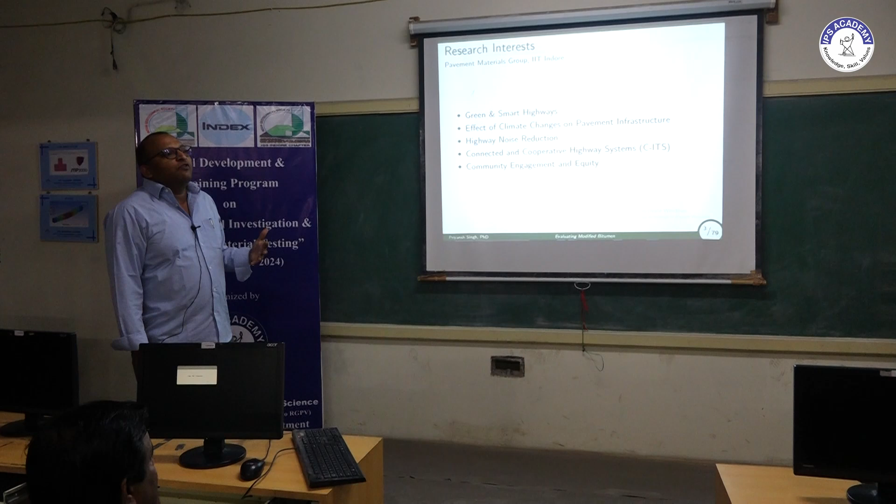The highway noise reduction, how we can reduce the noise of the highway because of the tire interaction with the highway surface. Also, we want to explore the connected and cooperative highway system, CITS, and also the community engagement and the equity distribution in the highway, because every highway project has almost most of the impact on the society from which it is going through, or the area it is going through.

So this becomes an essential part. So currently our group is focusing on all these domains. They are here in IIT Indore. As far as today's discussion is concerned, so we would be limited to these 3 IS codes actually.

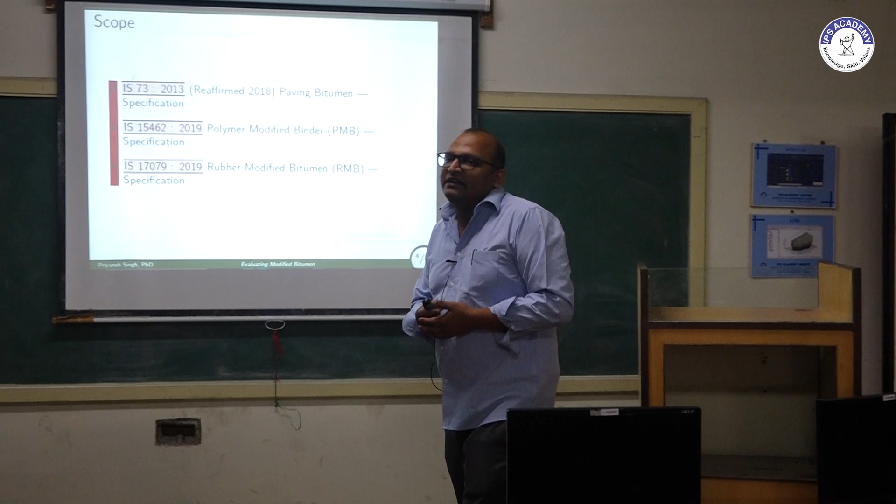So these IS codes are IS 73 2013. I think you must be aware of these specifications. This is actually the specification which gives binder grading or viscosity grading. The recent development happened in 2013 and later on it was also revised in 2018, but more or less they are the same. Then we have two latest codes, IS 15462 and IS 17079.

They both came in 2019 and they are the codes related to polymer modified binders and crumb rubber modified binders. Don't get scared by the words crumb rubber or polymer modified. Later on we will try to explain what these things are.

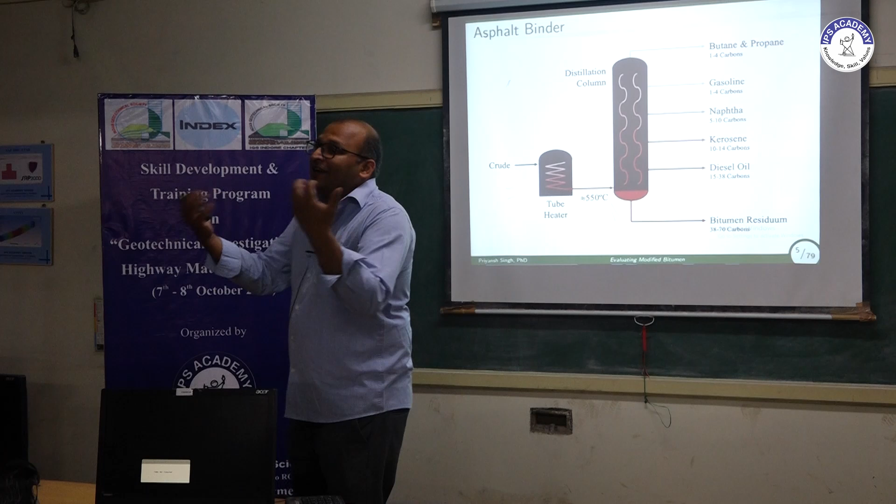We all know how we get binder. So it is just a distillation process of the petroleum, whatever we extract, and we distill that. The heaviest part of that distillation is your bitumen.

If you see the chemical composition of bitumen, it mostly has carbon, around 70 to 85%. Then the next major component is hydrogen, followed by sulfur, and some traces of nitrogen, oxygen, nickel, or other materials.

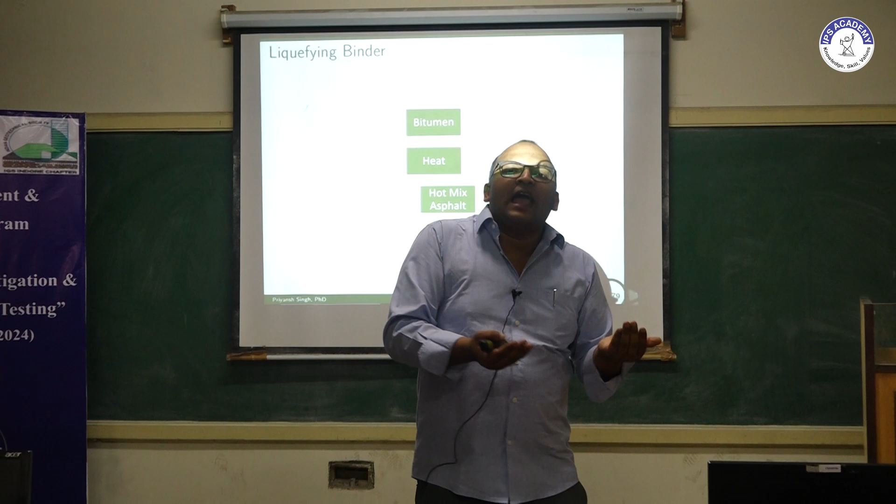Now the introduction about binder is fine, but as a civil engineer, what do we want to do with that binder? We want to make our roads out of it, and to make the road with that binder, we need to mix it with aggregate or other material. Like you mix cement with aggregate using water, but here in asphalt we cannot add water—water will not liquefy the asphalt material.

So instead of adding water, we use one technology, which is heating the binder. As you heat it, the viscosity will decrease and your binder will become more fluid. This is one technology; there are others too. You must have heard about cutbacks, emulsion, or other materials—they do the same thing but with different technology. Here today I am concentrating only on heating your binder.

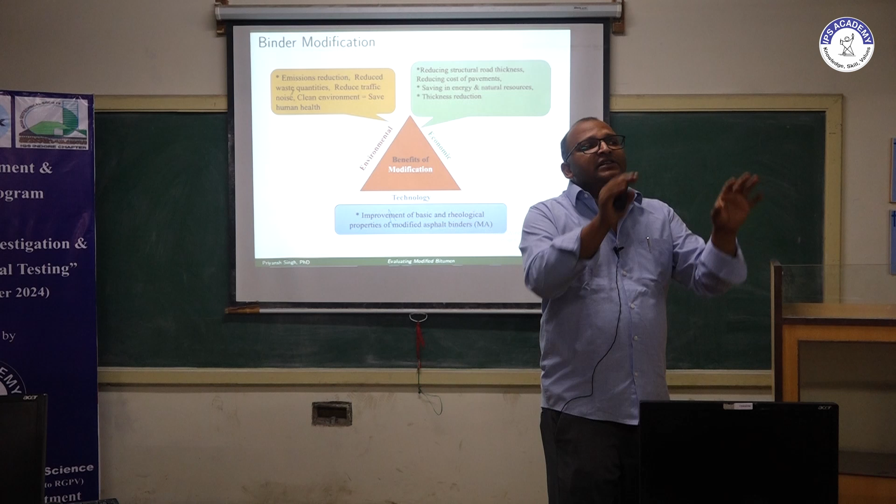Now, whatever existing binder we have, why do we need any modification in it? When I say a neat binder or bitumen, it means it's just a raw extract we got after distillation from the petroleum product. That petroleum product is cooked by refineries to meet viscosity grading, maybe VG 10, 20, 30, 40.

But nowadays temperatures are reaching extreme levels. We are seeing air temperatures of around 49 to 50 degrees. So pavement temperature will be a little higher than that—it may hit around 53 or 55 degrees Celsius.

Now at that temperature, if you recall your softening point test, today you must have done your softening point test. What value did you get? How much, 60? Which grade of binder were you testing? Cut back? No, cut back is a different thing, it's not a binder. Okay, anyhow.

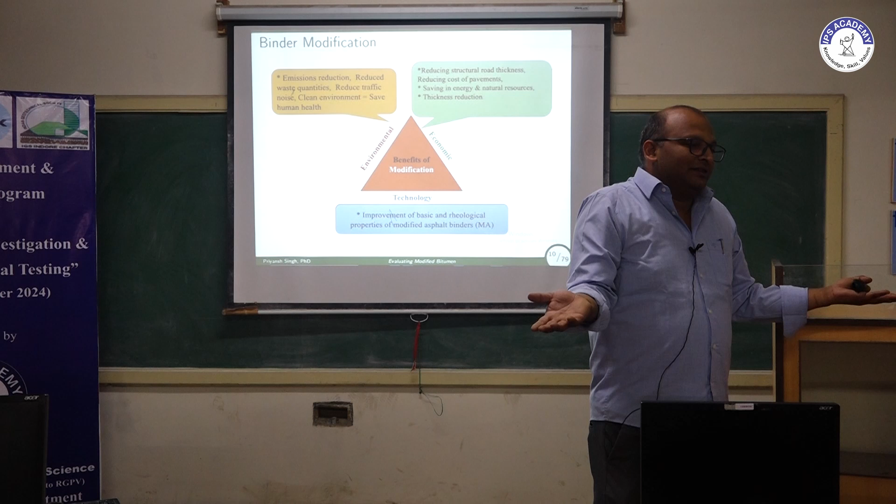But if you see the softening point value for most neat binders, it comes around the same range I'm talking about, around 50 or 55 degrees Celsius. That means at that temperature my binder is going to be soft enough to get deformed. So I need to make my binder more strengthened, to increase its strength so it can take more stress—thermal stress, climatic stress, or other kinds of stresses.

The modifiers we currently use are waste materials, in the form of plastic, crumb rubber, or other materials. So whenever you use a modified binder, you are also helping recycle some waste product. Because these binders can take more stress, your pavement layer thickness will be reduced, making the pavement more economic. Also, because the binder is strengthened, the pavement life will be longer. So there are multiple advantages of modification in your binder.

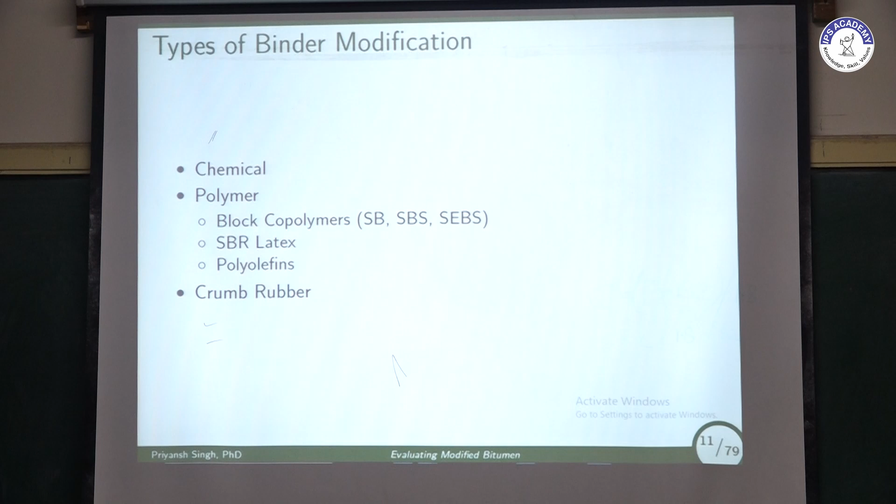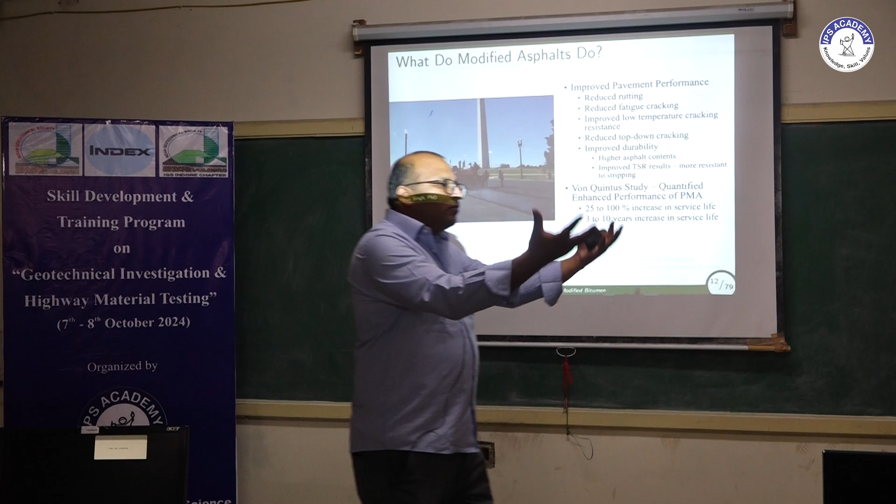There could be different types of modification: chemical modification, polymer modification, or crumb rubber modification. In this part of the talk, we will only talk about polymer and crumb rubber modified binder, not chemical modification. Now, what are polymers? Polymers are actually a chain. Whenever you add a polymer into the binder, they cross-link with it, and that's how they increase their strength. So if you modify your binder, there could be different types of benefits.

Some highlights of those benefits I have summarized here in this slide. They can improve pavement performance in terms of improving the rutting resistance. What is rutting?

Oh, this happens, don't worry. We will explain rutting also in a further slide.

So reduce fatigue cracking, improve low temperature cracking, reduce top down cracking, improve durability, and also increase the service life.

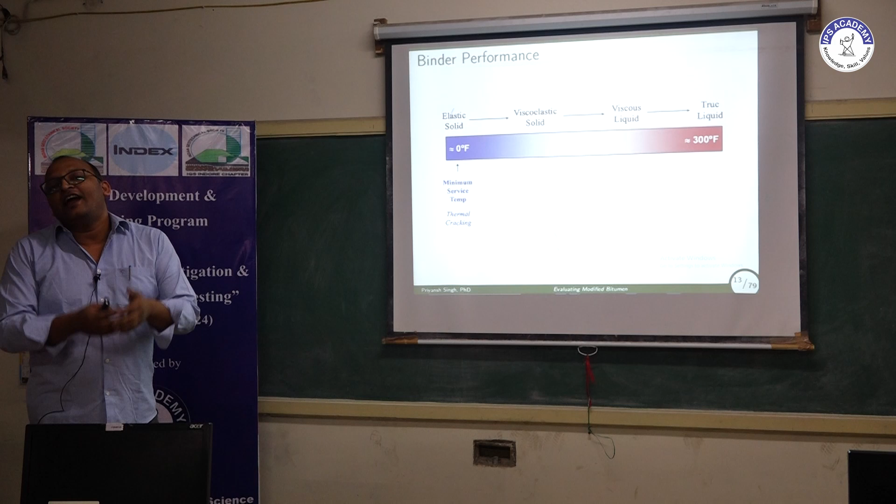Now, in order to understand the binder, first we need to understand what different scenarios my binder goes through. Means if you have fever, you need to understand how your temperature is rising, then only you will give the correct dose of paracetamol, isn't it? Similarly, we need to understand the different stages of binder. So those stages in case of binder is when your binder is at 0 degrees Fahrenheit or at very low temperature.

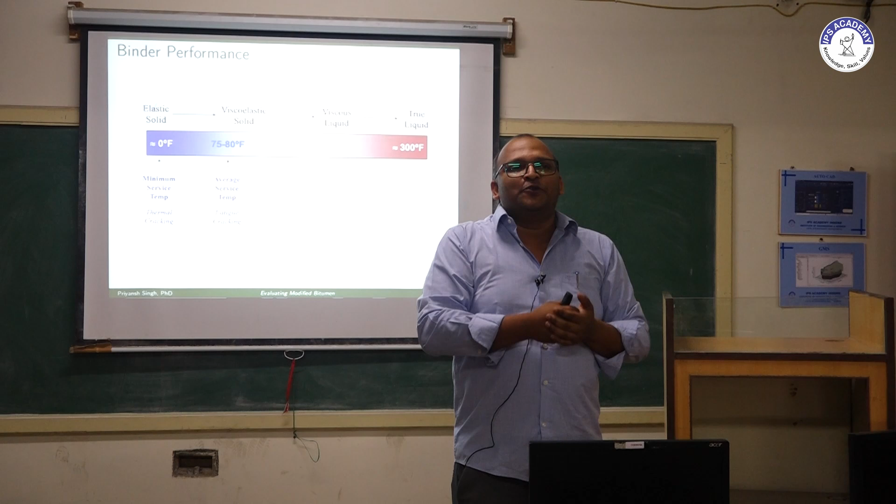The next temperature important for the binder is the average service temperature, that is around 25 degrees Celsius. Now this 25 degrees Celsius temperature is very important. If you want to connect this temperature with whatever test you have performed today, at what temperature have you done your penetration test? At 25 degrees Celsius, isn't it?

And at what temperature have you done your ductility test? 27, that is as per the old code. Now it is being revised. We need to do the ductility test at 25 degrees Celsius on the RTFOT sample.

So this average service temperature is actually the ambient temperature in the European and American region. But because we copy everything from the European region, that is why we have taken this 25 degrees Celsius temperature from there also. So we assume that our ambient temperature, our average temperature, is going to be 25 degrees Celsius, and this is the temperature when you will undergo the fatigue cracking.

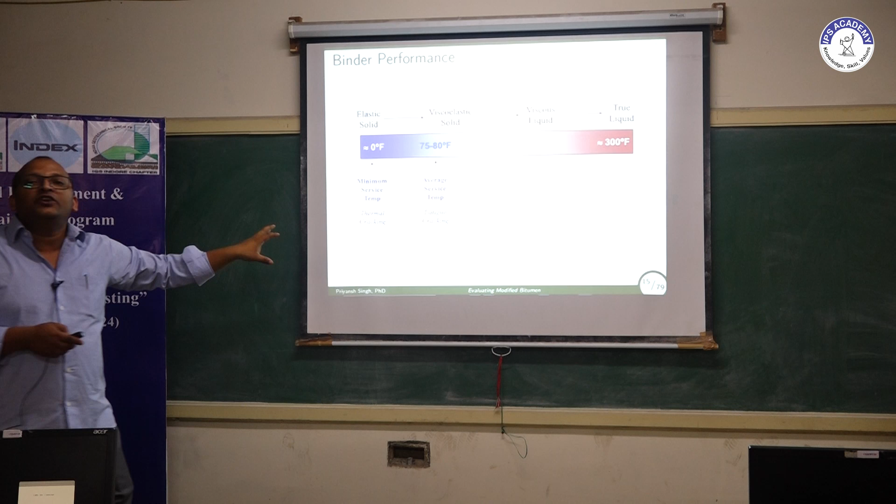Now what is fatigue cracking? This is the cracking because of load. If you have a number of repetitions of the load over the pavement, the capacity to take load will decrease, and whatever stresses accumulate will release in the form of fatigue cracking. This is also known as alligator cracking.

The next important temperature your pavement or binder will undergo is the maximum service temperature. This is the temperature which is around 50 or 60 degrees Celsius, maybe 50 or 55 degrees Celsius in India maximum. And if you see, this value is around the softening point value, you will get around 50-55 degrees Celsius.

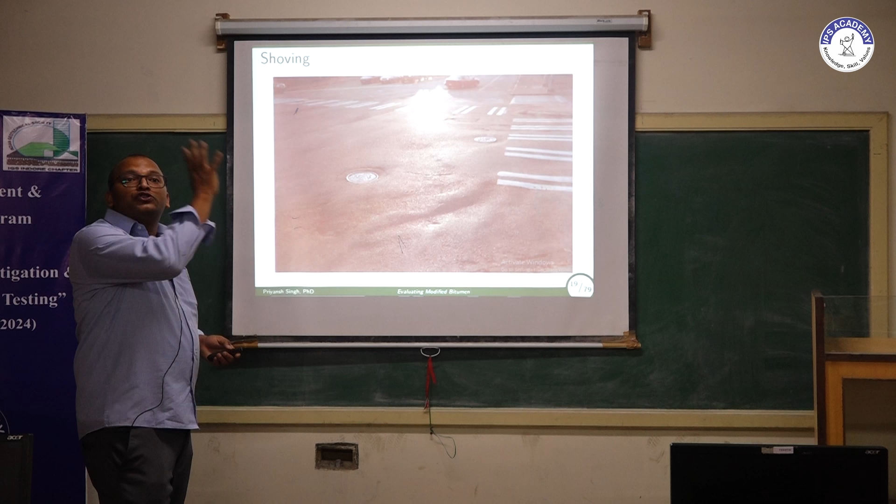So this temperature is also very important, because at this temperature the pavement will undergo plastic deformation which will be unrecoverable, and that is known as rutting. So whenever you have a number of vehicles moving on the same path, they will make a gully-like structure, and that is known as rutting. This happens at higher temperature. Also shoving, you might have seen this kind of plastic undulation on the pavement. This also happens because of heavy temperature deformation or high temperature deformation.

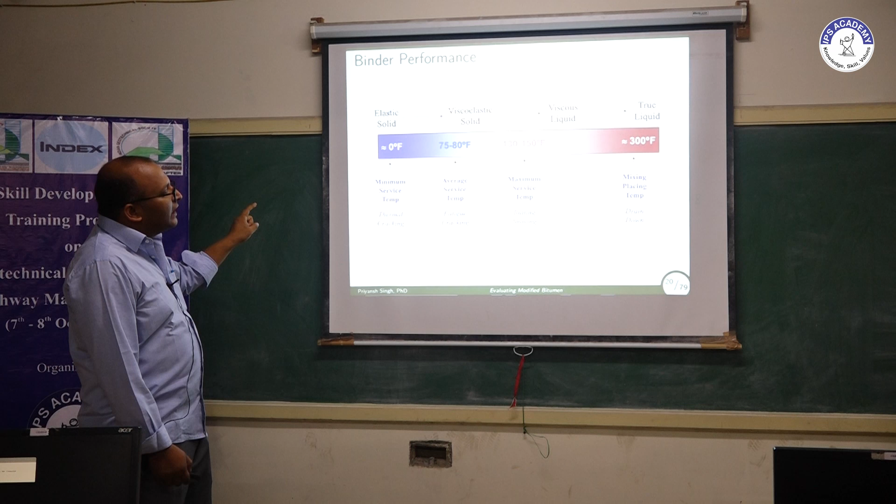Now the next important temperature which your binder will undergo is the temperature at which you mix it with aggregate. That is going to be 135 degrees Celsius or maybe 160 degrees Celsius, depending upon your mix design. So all these temperatures are very important in order to see the binder's performance, and that is why we have designed a spectrum of tests to characterize binder at all these temperatures.

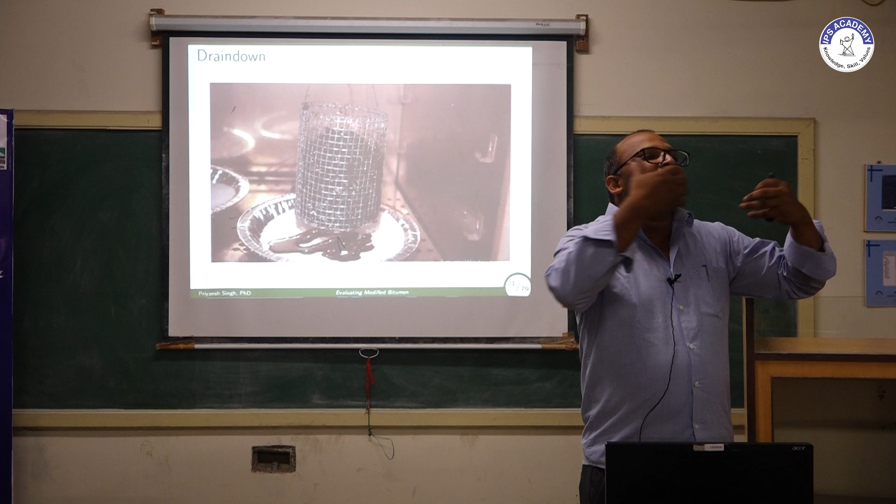Now let's see what different tests are there to characterize our binder at these service temperatures. So the first test I am discussing is at the high temperature, which is drain down. Whenever you are mixing your binder with aggregate, the binder and aggregate should not separate from each other. If it is separating from each other, it is called drain down, that means if you put your mix, binder will separate out. That should not happen. This test is related to mixing temperature.

Now let's discuss some other conditions our binder undergoes. When you get your neat binder from the refinery, the binder will have no aging. But when you heat your binder to 135 or 160 degrees Celsius, the binder will undergo some aging.

After this heating, you will mix it with aggregate. At that time also, the binder will remain at elevated temperature. And again, when you transport from the mixing plant to the field and compact, in this whole duration, the binder will be at elevated temperature.

You know the binder has resins and saturates, that means some volatile elements. So if you heat it, some volatiles will be lost, and also at elevated temperature the binder may undergo an oxidation reaction, and that's how the stiffness of the binder may increase.

So the first instance, starting from mixing till the laying, compaction, till cool down at the field, this is known as short term aging.

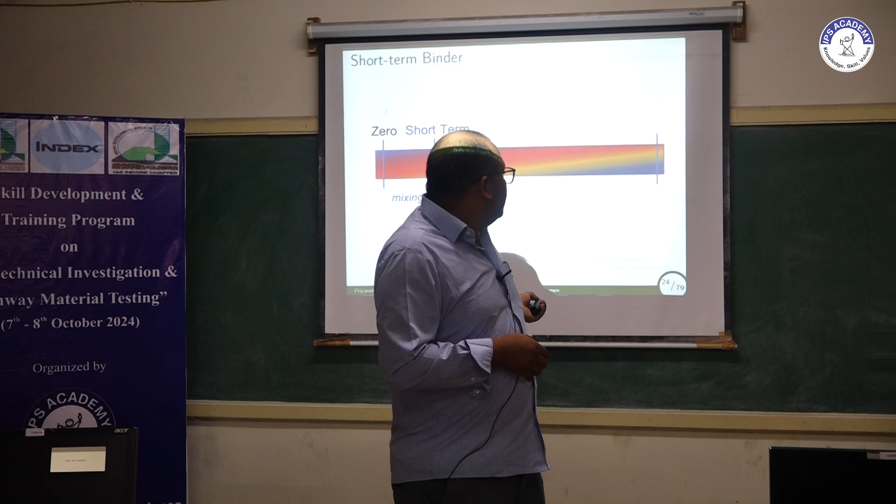Zero, when we have no aging. Then mixing and laying, when we have short term aging. And then your road will have some service life, maybe 15 years, 10 years or 20 years, depending upon your pavement design. And that aging we call long term aging.

So first let's see how to simulate the short term aging, then we will come to testing. In order to simulate short term aging, there are two protocols: thin film oven testing and rolling thin film oven testing.

Have you done this test? You might not have performed this test. This is a simple oven.

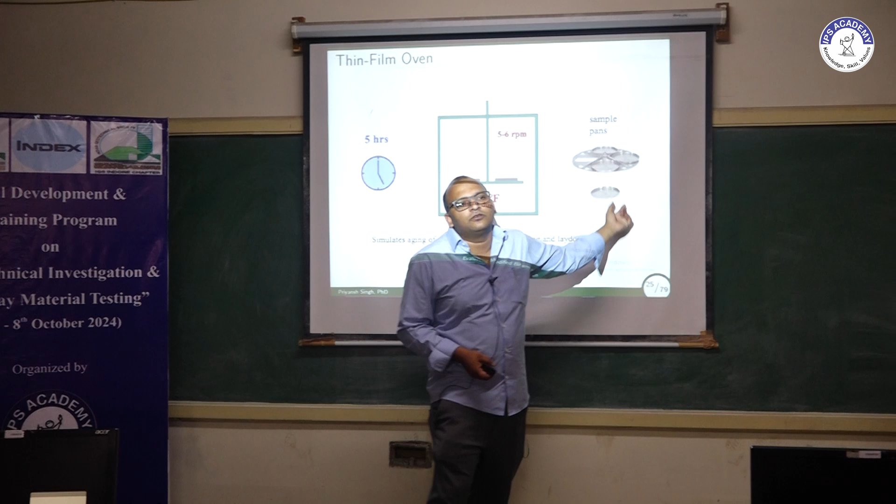There is a horizontal plate, you can see here, and then we have some small plates. In this plate we will put around 30 grams of binder, and then we will put it in this larger plate, and this plate will rotate at a speed of 5 to 6 rpm.

At the same time we will expose it to high temperature, around 163 degrees Celsius, and we will keep this binder for 5 hours, and that is going to simulate our short term aging.

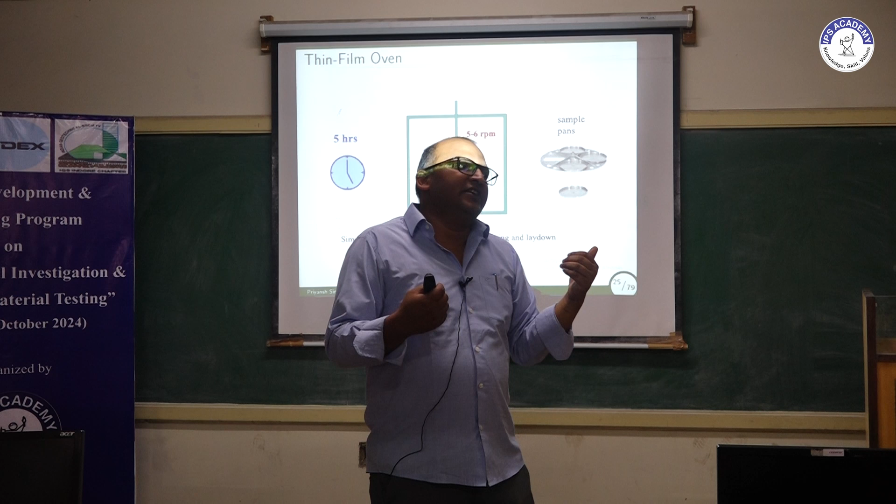Now in this test you see we require 5 hours of time, and nowadays nobody has time. So in order to reduce the time, there is a modified version of this thin film oven test, called the rolling thin film oven test.

In this rolling thin film oven test, you have a vertical cage in which you will put your samples. We put our samples in glass jars, keep them here, and blow air at 163 degrees Celsius for 85 minutes inside this oven.

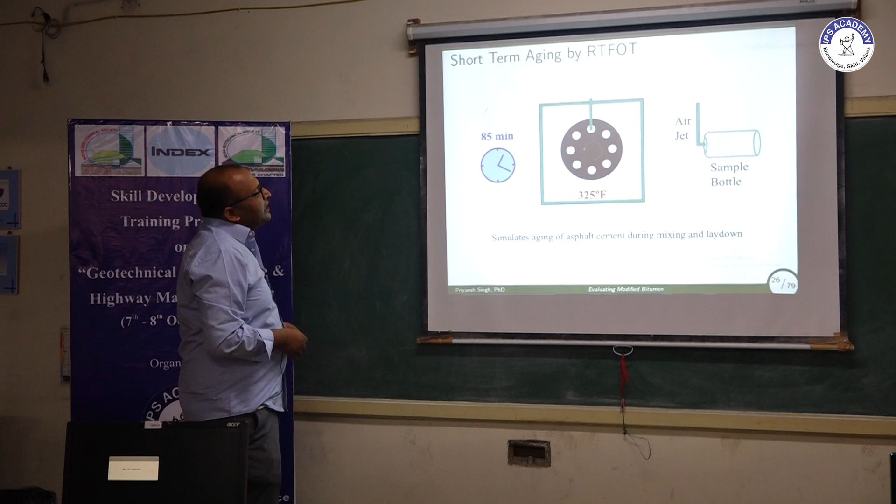During this process, the cage will rotate at a speed of 15 rpm, and because of this rotation, the binder will rotate around the tube. As the whole tube rotates, the binder rotates inside it.

This creates a very thin film of binder on the surface of these jars, and that is why the name came as rolling thin film oven test. Because the surface area is more, we achieve aging in a shorter time period, so the test takes only 85 minutes to complete.

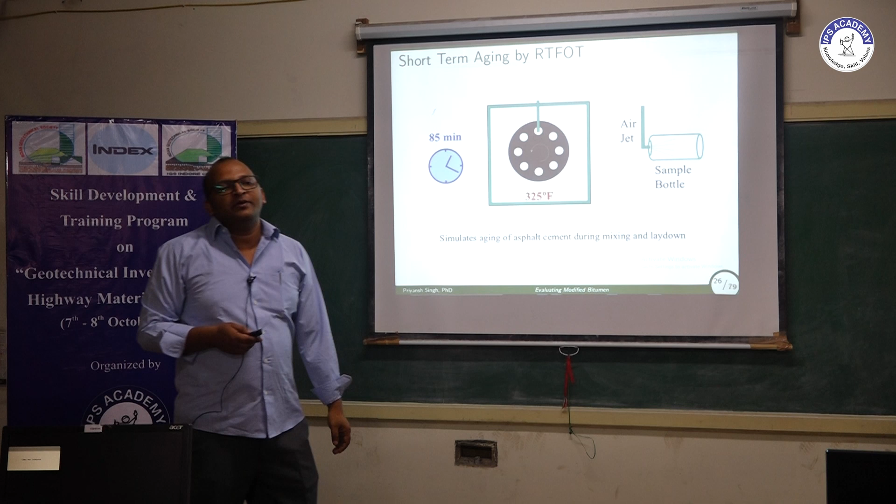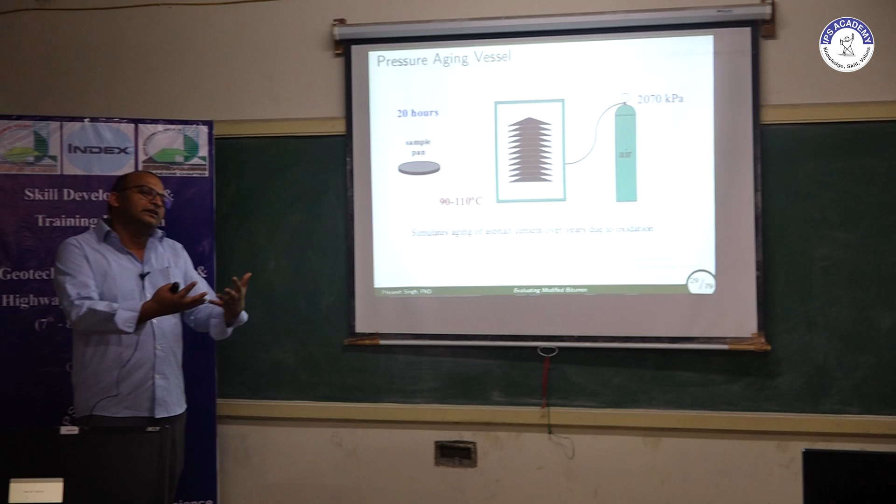Then the next aging scenario is long-term aging. Long-term aging means aging after the service life of the pavement, maybe after 10 or 15 years of time. In order to simulate this 10 years of service life of the binder, we use a pressure aging vessel.

A pressure aging vessel is something like a pressure cooker. We will have some plates, put our binders in them, and then put them inside a pressure cage. We maintain a temperature of around 90 to 110 degrees Celsius, apply a pressure of 2070 kPa, and keep this for 20 hours of time.

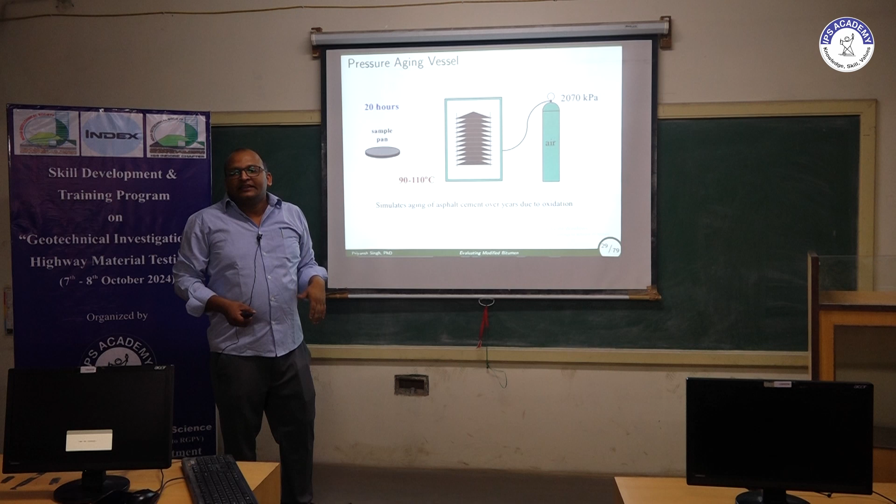This gives a simulation of when binder gets aged after 10 or 15 years.

So till now we have seen that the binder will undergo different temperatures: 0, 25, 60, 135, and we have seen the binder will undergo 3 different aging levels, which are 0, short term, and long term.

Now let's come to testing and try to correlate with these conditions how our tests are being designed.

Whenever we have minimum temperature, your binder will behave like an elastic solid. Elastic solid means a material which follows Hooke's law.

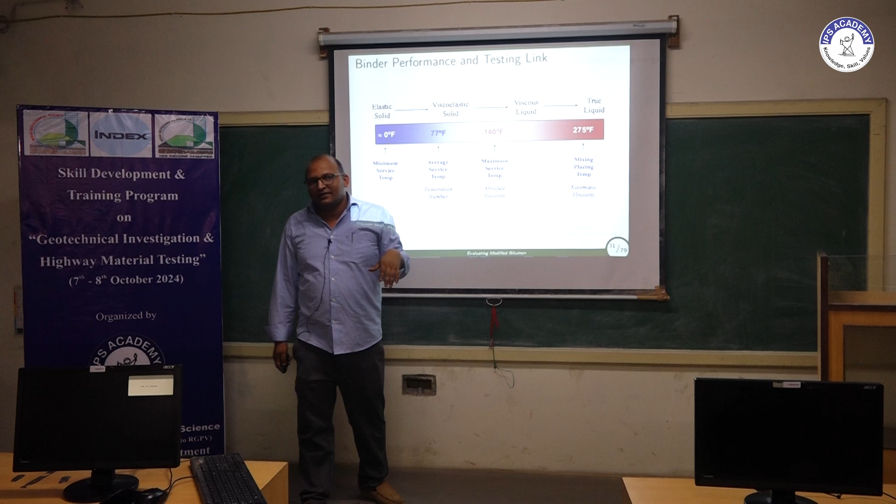At the average temperature, the binder will behave like a viscoelastic solid. I will not ask what viscoelastic solid is. If you further increase the temperature, the binder will become a viscous liquid, and if you increase it further, it will become a liquid.

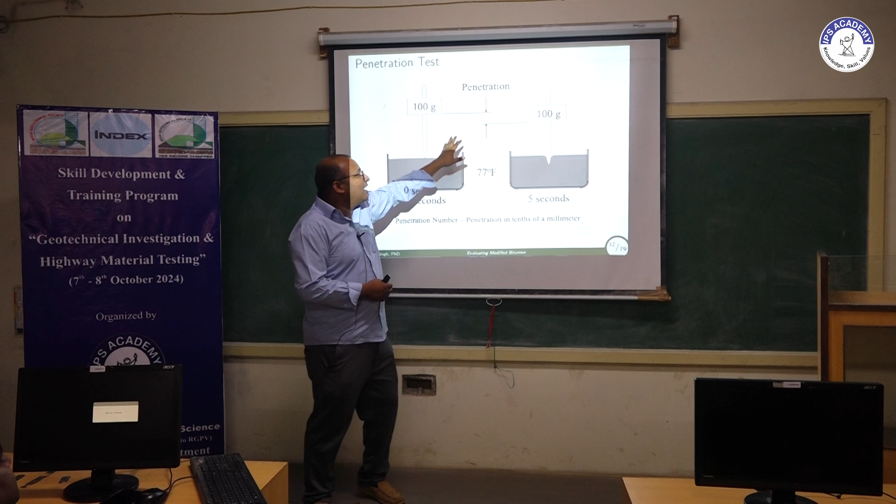So the first test we do to characterize the binder at ambient temperature, that is at the viscoelastic domain, is the penetration test. Very basic test, which you might have performed today. We will put the binder in a container, take a needle, and apply a 100-gram load for 5 seconds at 25 degrees Celsius. This is what penetration is. Try to connect what this test is trying to do.

It is trying to measure the viscosity of this material at 25 degrees Celsius, in some other terms. However, the repeatability of this test is very poor. Whenever you have performed it, you may have realized that the results are not consistent.

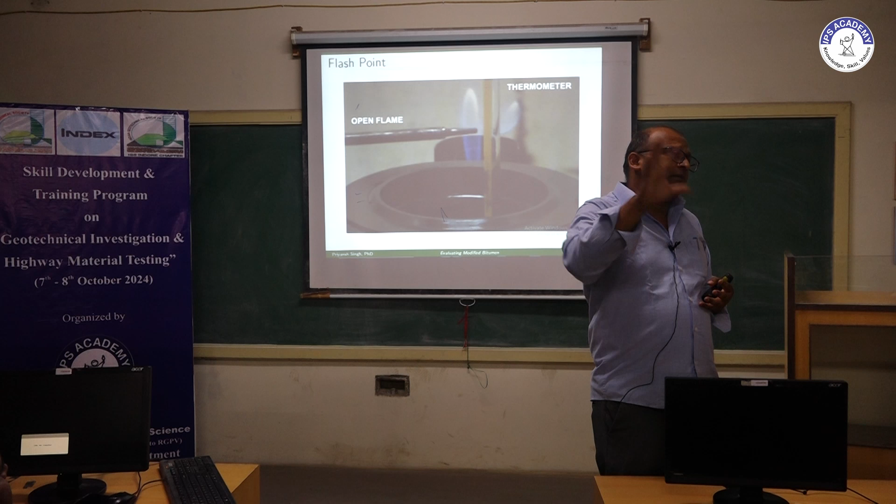The next test is at higher temperature, and that is to ensure safety, because in the field we are going to heat our binder, and we need to restrict that the binder should not be heated more than a certain temperature. In order to find out this temperature, we do the flash or fire point test. I think you must have performed this test.

Then there's the ductility test. Now, I have kept this ductility test on the unaged sample only, but the 2013 version of IS 73 has kept this test after short term aging. So just take care of this.

In ductility, we put our binder in a standard briquette, and then we stretch it at a standard rate. What property does this signify? Ductility. But in practical terms, what does ductility mean for a civil engineer? It signifies the coatability of the aggregate, that means how much this binder is going to coat your aggregate. This coatability is taken care of by ductility.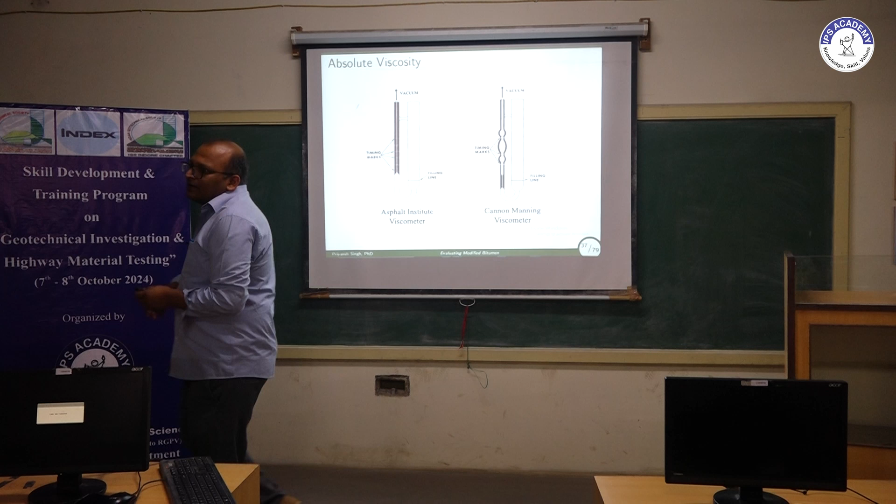Then we have a test called absolute viscosity, which we normally perform using a Cannon Manning viscometer. Have you performed this? This kind of tube is used - this is actually the Cannon Manning tube.

We put the binder in this tube and keep it at the desired temperature, which is 60 degrees Celsius, then apply a standard vacuum of 300 mm of Hg. Because of the pressure the binder will flow, and we record how much time it takes to cross from this mark to this mark, and this mark to this mark. The average of these two, multiplied by the constant of this tube, gives you absolute viscosity for your binder at 60 degrees Celsius. This is very important for viscosity grading, because the numbers you get, VG10, VG20 or VG30, are because of this test.

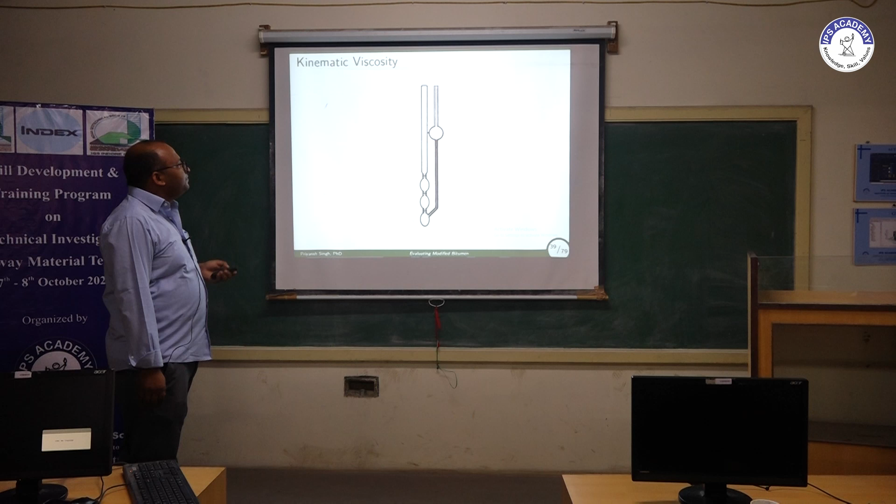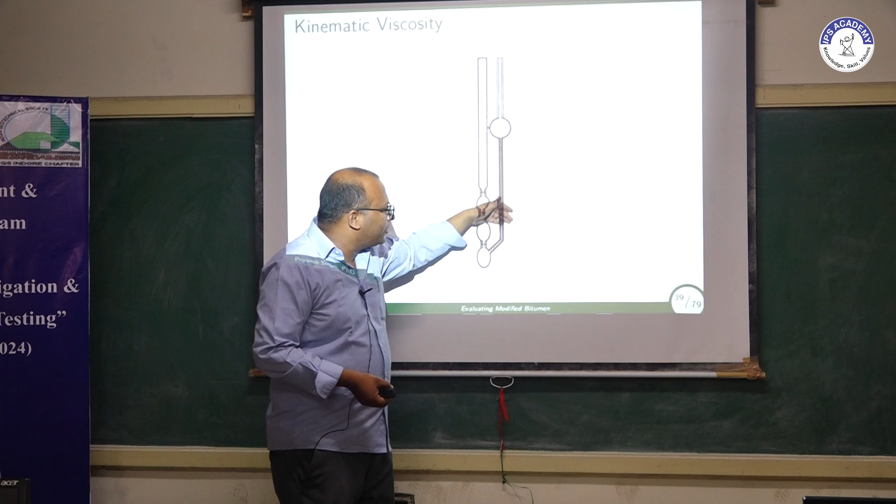Then one more test we do for viscosity is kinematic viscosity, which we do at 135 degrees Celsius, and that signifies mixing and compaction. For that we normally use a Cannon Fenske tube. We load our binder in this bulb, allow it to cross through these lines, and note the time when the binder crosses these lines. That time, multiplied by the tube's constant, gives you the kinematic viscosity of the material.

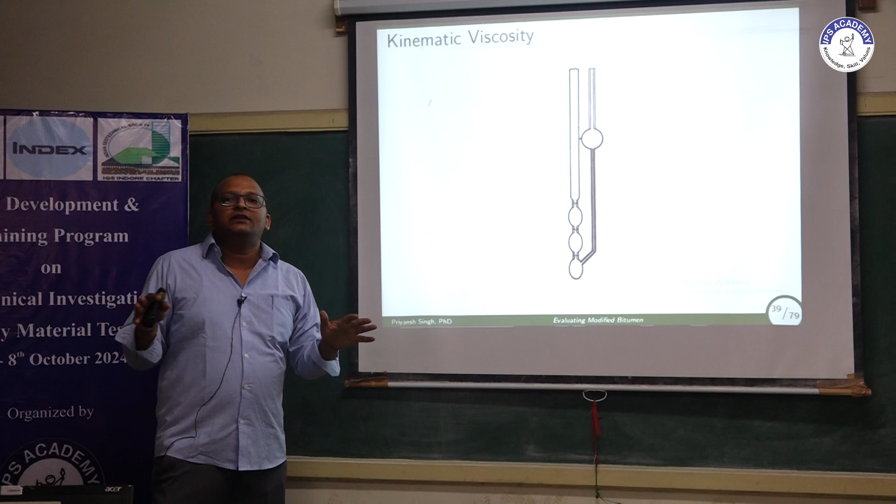Now, how are absolute viscosity and kinematic viscosity different, and why are we measuring both? We can measure absolute viscosity at 135 degrees Celsius also, so what is the reason to characterize kinematic viscosity? The first differentiation to make is that in absolute viscosity, we applied an external vacuum to make the binder flow. But in this case, we don't apply any vacuum or external force to make the binder flow - the flow occurs because of gravity, and this is the actual case which happens when you mix your binder with your aggregate. So kinematic viscosity is the real measurement of how your binder will behave when mixed with the aggregate.

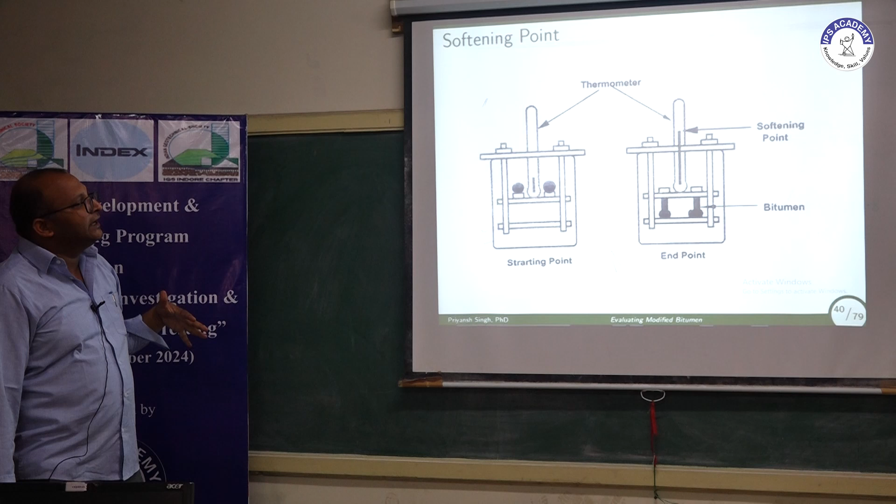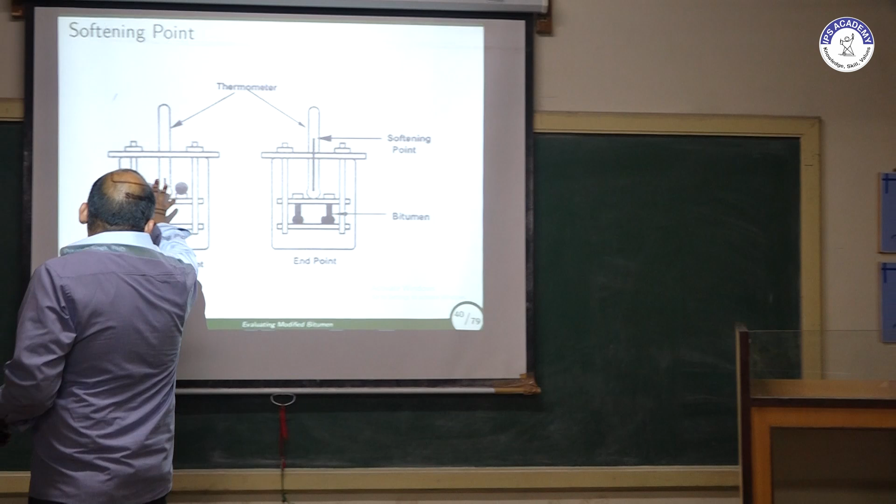Then the next type of testing on the neat binder is the softening point test, also known as ring and ball. Here we take samples on two rings, keep them at 5 degrees Celsius, then start testing. At the same time we put balls of around 3.5 grams, and whenever these balls touch the bottom of the frame, that temperature we take as the softening point.

This softening point is actually an indirect measurement of a particular viscosity - a viscosity that we want to signify a binder attains at that temperature. So it's the reverse of penetration. In penetration, we measure viscosity at 25 degrees, but here we want to measure at what temperature a particular viscosity is attained.

Based on these tests, the IS 73 code is being formulated. You can see the 4 different codes: VG10, VG20, 30, 40.

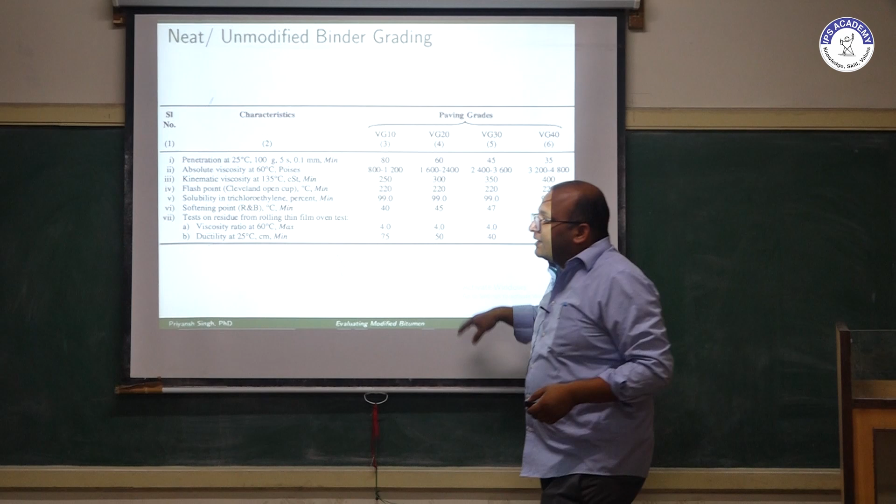All the properties we have discussed: penetration, absolute viscosity, kinematic viscosity, flash point, solubility test in trichloroethylene, which means how much purity it is, then the softening point, and then the test on the rolling thin film oven that I told you, the short term aging. These 2 tests you have to do on the short term aged samples, not on the neat samples.

Those are the viscosity ratio and the ductility. Now we have done this grading very well. We have VG10, 20, 30, 40 binders.

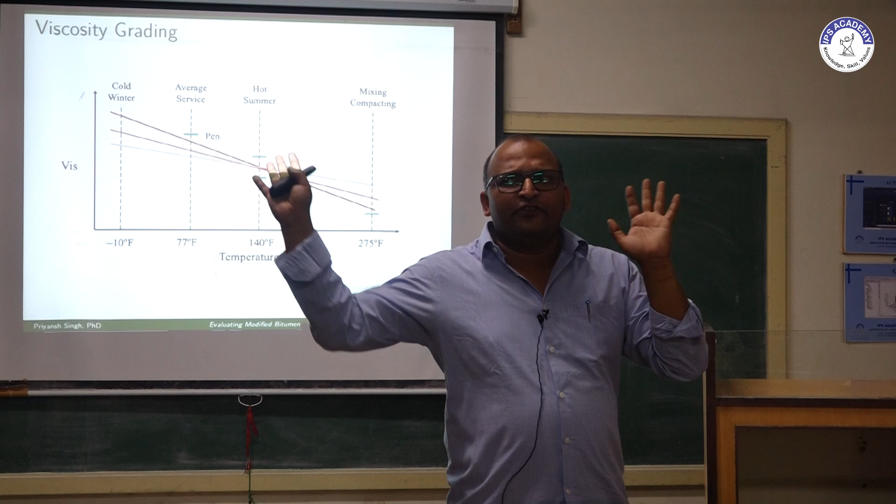But whether these gradings are fair enough to separate out the different types of binder, to understand, let's see this graph.

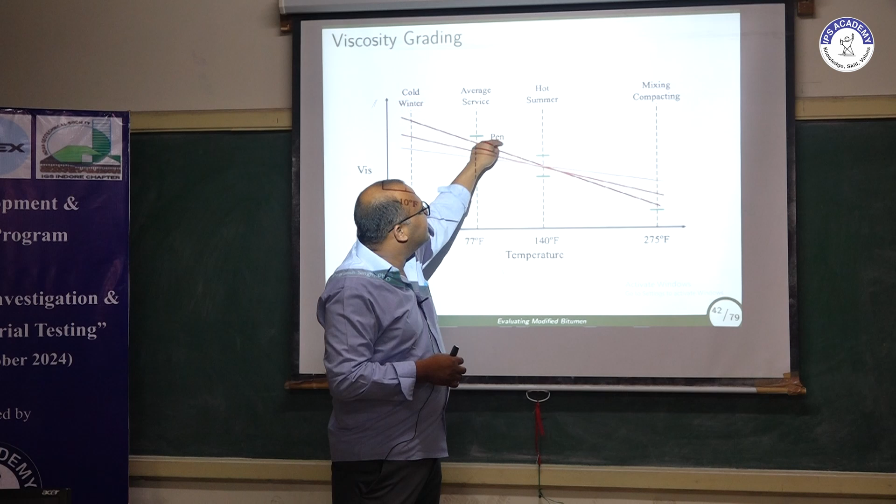Now we are grading our binder based on the viscosity at 60 degrees Celsius. So here if you can see, all these lines have the same viscosity at 60 degrees Celsius.

However, their penetration values are different, their performance at cold temperature is different, and their performance at high temperature is different. So should I grade all these binders as the same VG grade binder, or should I come up with a different grading criteria?

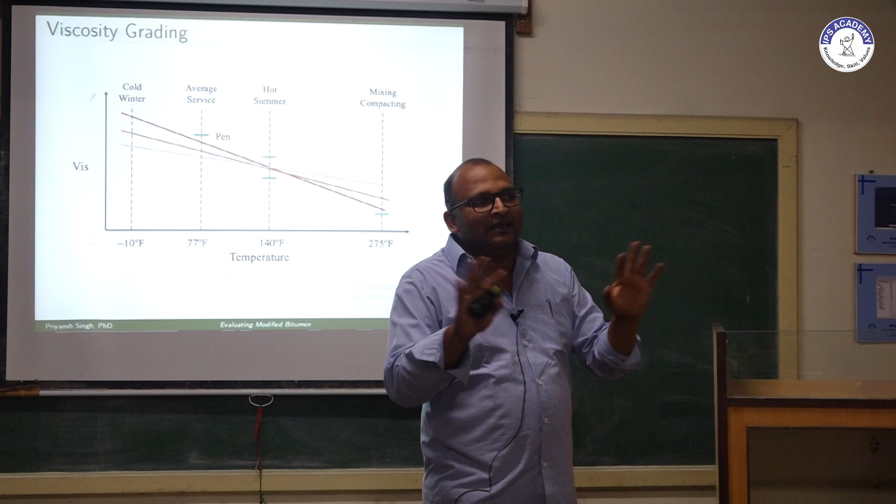This is the biggest question our pavement material people are dealing with: how to modify this grading system in order to account for these problems.

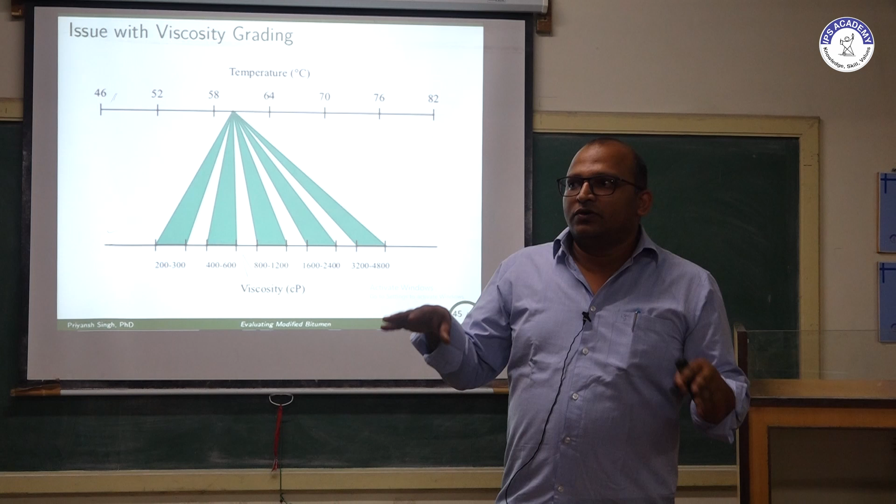Now the main problem is, fundamentally, where we are wrong. Whatever test we are doing, we want to check the properties at 60 degrees Celsius. But this is not the case.

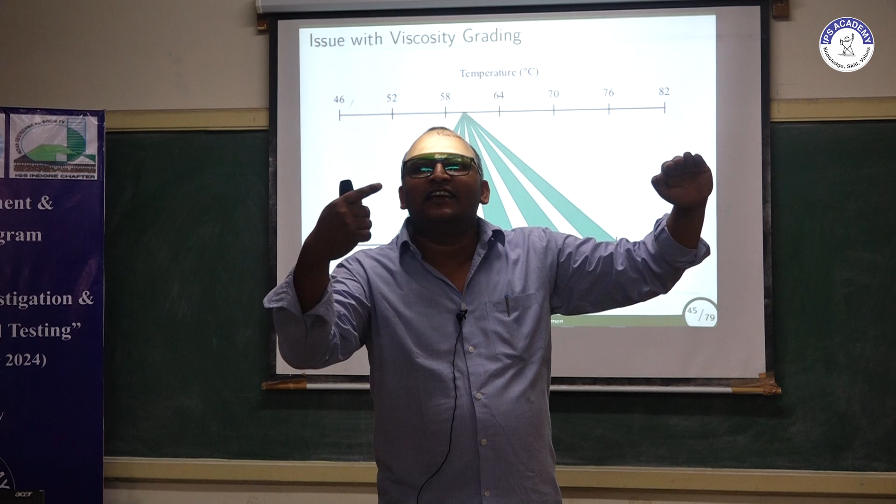Let's suppose you want to design a pavement at Indore. So you want to check at Indore's temperature whether a particular performance is being met or not. But instead you are checking it another way - you are checking whether at 60 degrees Celsius what performance is being delivered.

So this is the fundamental problem. Instead, we need to check at what temperature a particular performance is met.

So to address this, the US came with a very high monetary scheme called SuperPave, and they gave a SuperPave specification.

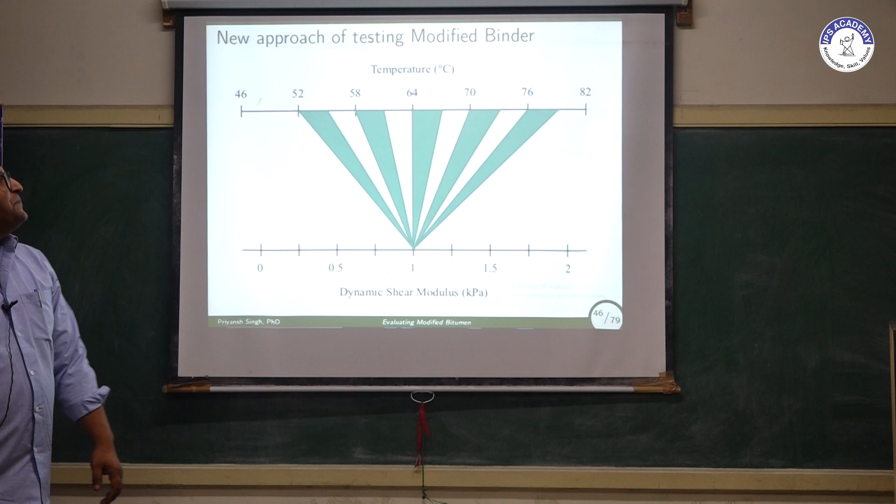So the US came with very huge funding, a project called SuperPave. SuperPave means Superior Performing Asphalt Pavement.

Now in SuperPave there is more realistic testing included, and we try to signify the performance of the binder based on their service temperature rather than the performance at 60 degrees Celsius or any other temperature.

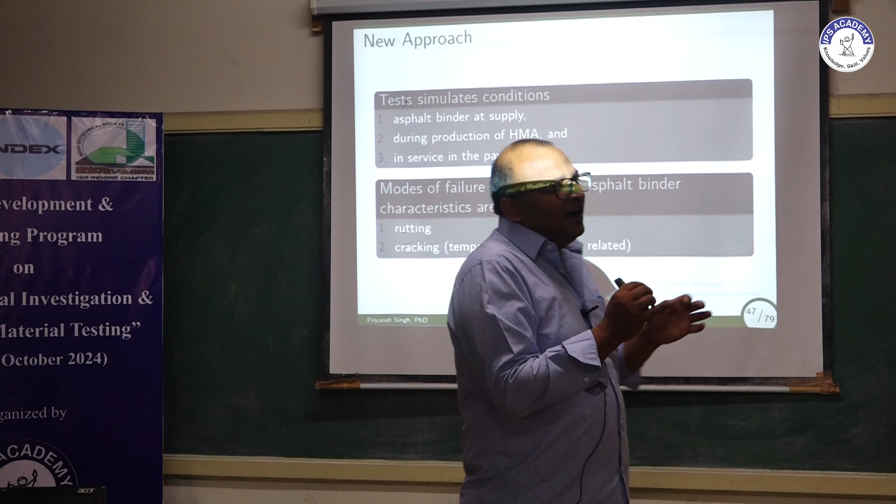This program actually came around 1992 in the US, and today in India we are trying to adopt a partial form of that in our code, and that partial thing we are going to discuss here.

We will not discuss the full SuperPave grading system.

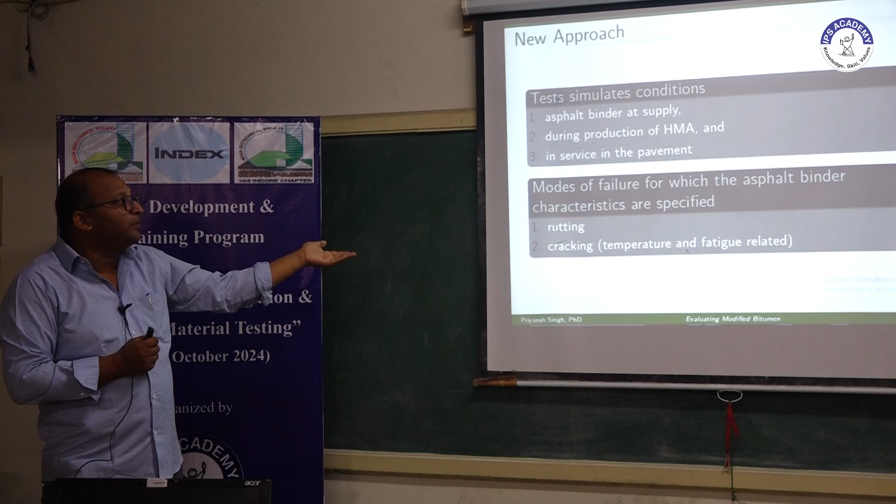So that partial thing we are trying to adopt is: we want to simulate the condition at supply, that means at zero aging; during production, that means at short term aging; and after long term aging. We also want to check the performance at rutting and cracking.

So in order to check that, first let's see the set of tests and let's see how they are connected. The first test is the high temperature testing, around 135 degrees Celsius or maybe 160 degrees Celsius, that is at your mixing and compaction temperature.

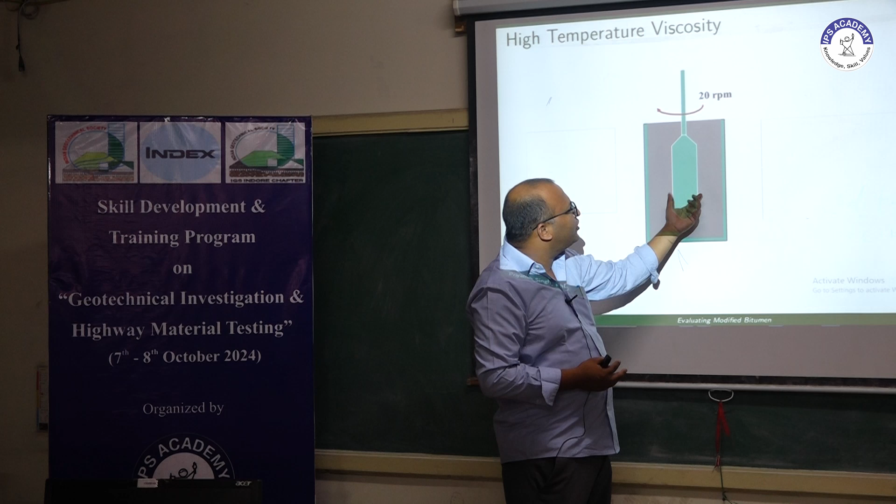Now this test is done by a rotational viscometer. I will not go into the details of the rotational viscometer scheme, but it has some kind of a spindle. You will have fluid filled in a container, and this spindle rotates inside the fluid. The motor tries to rotate it at a constant speed of 20 rpm or whatever is desired.

The amount of energy required to rotate this motor will signify your viscosity. If a higher amount of energy is required, that means the viscosity is higher, and if lesser energy is required, that means lesser viscosity.

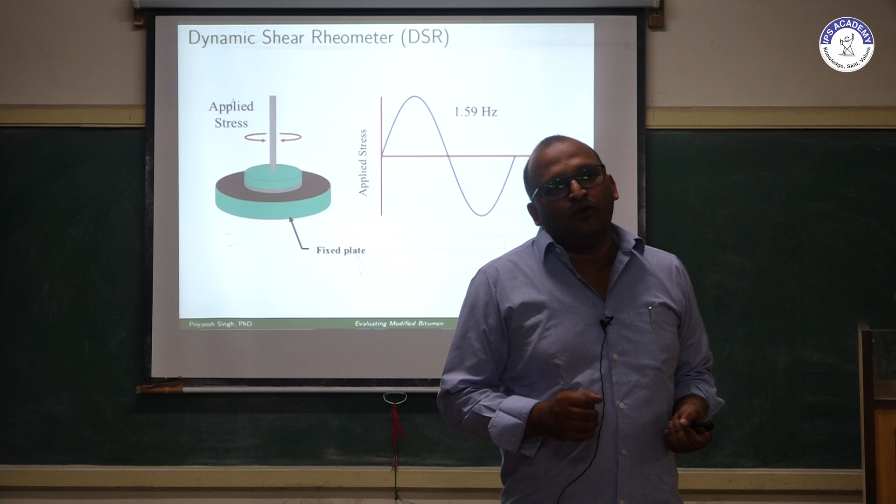Then the next biggest improvement which is being brought in the form of dynamic shear rheometer. Now, as we have discussed, in service temperature our binder behaves like a viscoelastic material. A viscoelastic material has both properties partially - it can behave as a viscous material and also as an elastic material. So in order to characterize that viscoelastic nature, this DSR testing is introduced.

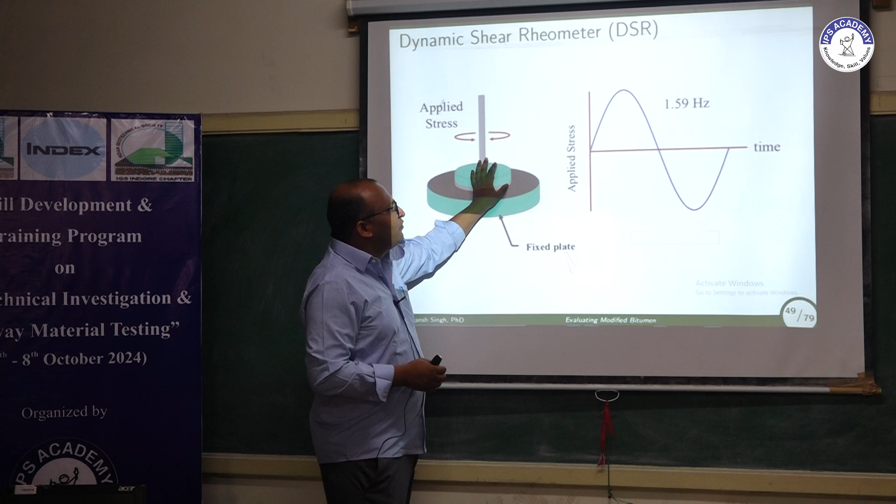In this testing there are two plates, if you can see, and we will put our binder inside this plate and try to load an oscillation loading on this sample. That oscillation loading means it will go this type. A clear picture will be there in the next scenario. So this is the equipment picture.

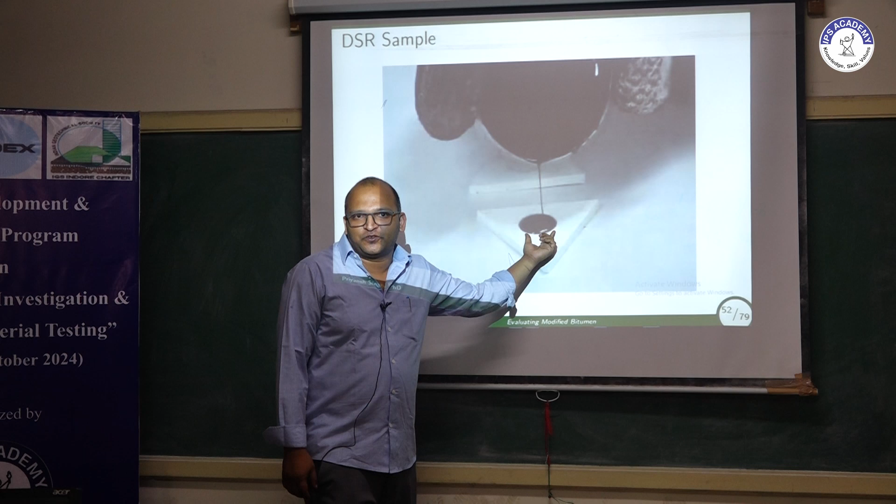Here you can see two plates, so we'll put our binder here in between these two plates. This is the kind of sample of the binder required, and then we will try to load the binder. The loading will be: this plate will move from A to B, B to A, and then A to C, and then C to A. That means a half rotation this side, then again a half rotation this side. So this will generate a shear on the binder, a half shear, then again a half shear.

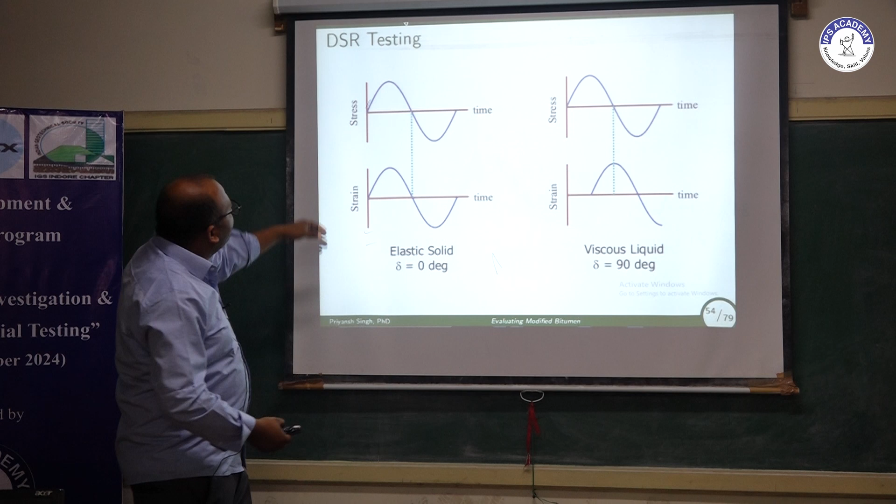So if we discuss the elastic material, you know Hooke's law, stress strain curve is a straight line. That means if you put some load, at the same proportion you are going to see the strain immediately. And if we discuss some viscous material, if you put stress, the strain will develop after 90 degrees of lag or 90 degrees of phase angle. Our viscoelastic liquid or viscoelastic material will be in between these two.

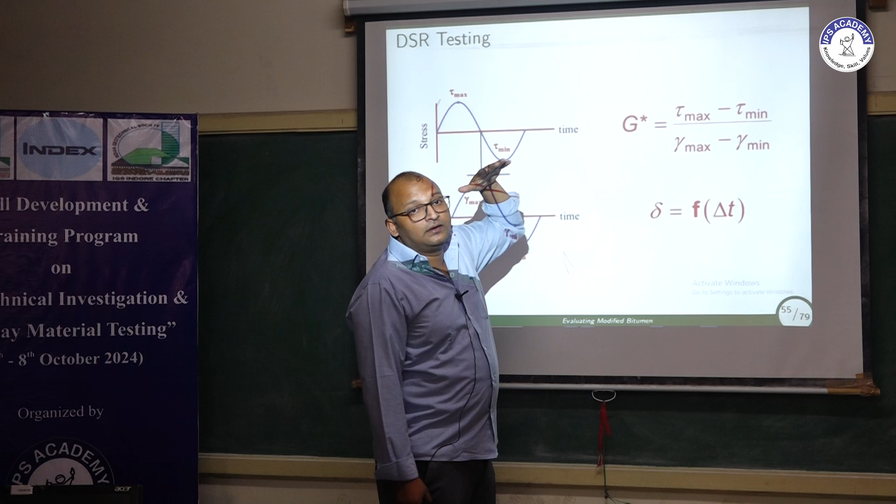So if you load your binder with some stress, the strain will develop, but after some time, and that time lag is known as phase angle, delta. The ratio of whatever the maximum minus minimum stress upon the maximum minus minimum strain is called complex modulus. This is similar to your elastic modulus or Young's modulus, whatever you have seen.

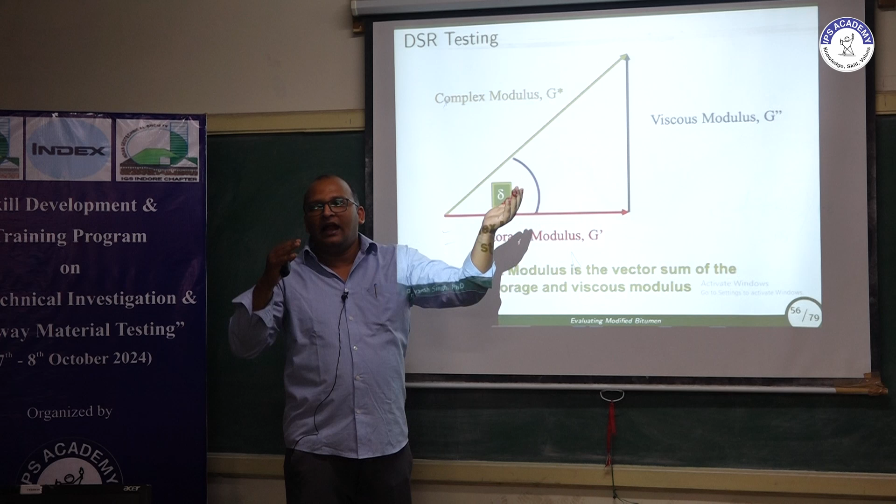So here this complex modulus we signify as a complex number. In this complex number we have two components. As I told you, viscoelastic material will show a viscous and elastic behavior, so we will try to separate out this viscous and elastic behavior. There will be a viscous modulus and there will be a storage or elastic modulus, and this delta is your phase angle what you have calculated, and the modulus of these two will be your complex modulus.

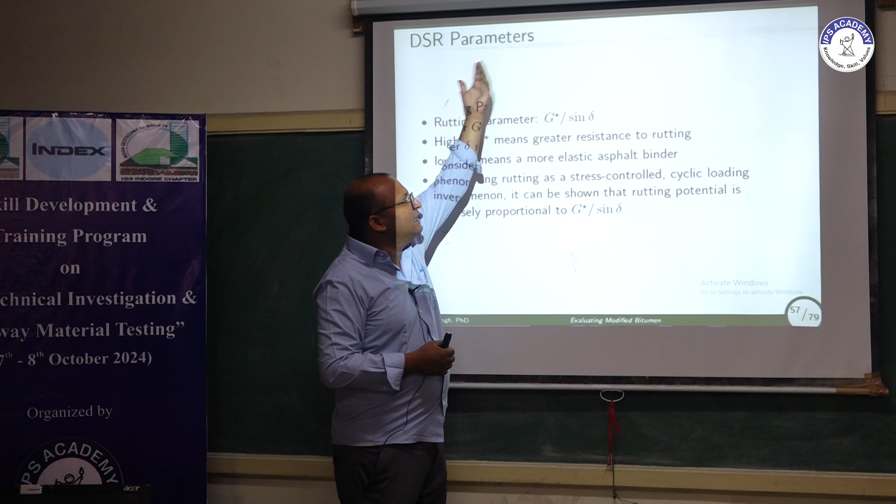Now this complex modulus is a very important parameter which will signify all the properties. Once you have estimated your complex modulus and phase angle, you can calculate a rutting parameter as specified by FHWA, which is your complex modulus divided by sine delta or sine phase angle. Now what it signifies: if your G star is higher, that means your material is more stiffer. More stiffer means it will undergo less rutting or less deformation.

And if your delta is low, that means your material is more elastic. So what do you want? You want better stiffness and more elasticity, isn't it? From a binder, you want whatever deformation is there, that should recover quickly. So we want more elasticity property and high stiffness at the same time.

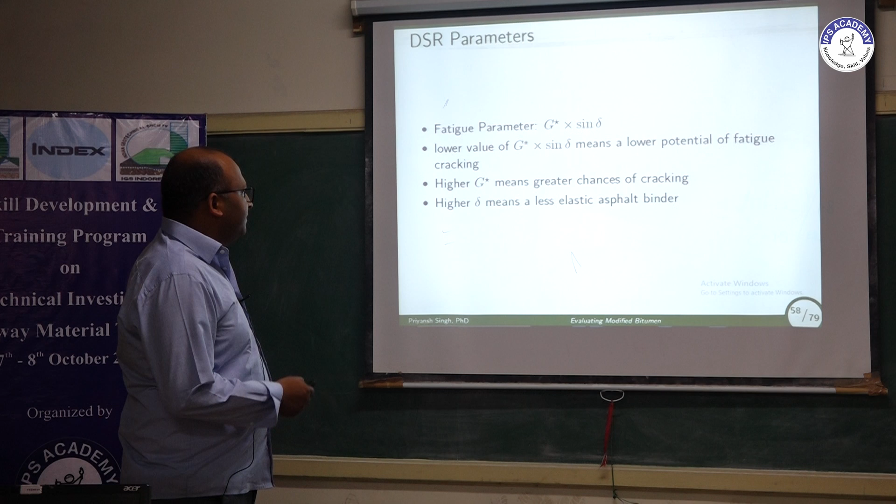Similarly, we have the next parameter, which is G star sine delta, which we know as a fatigue parameter. Again here, if G star is higher and delta is higher, then the lower value of G star sine delta means the lower potential of fatigue. In DSR testing on unaged sample, your G star by sine delta value must exceed 1 kPa for unaged sample.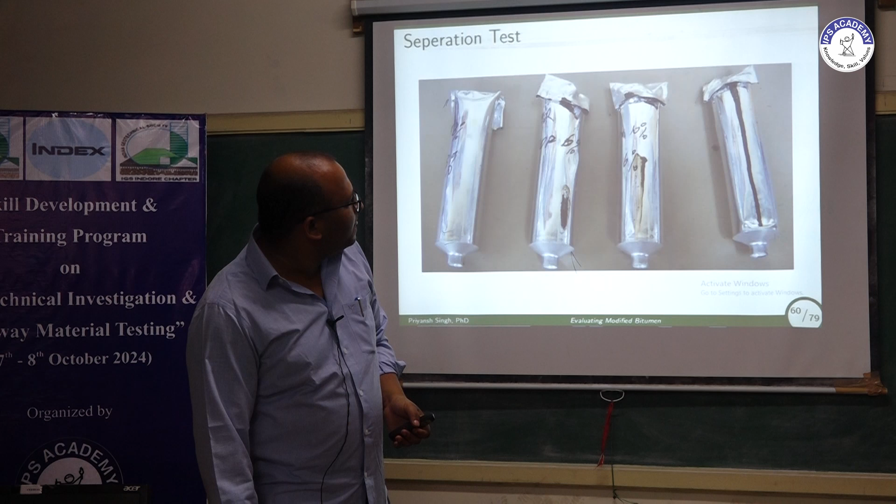Then the next test what we will perform is the separation test. Because we are adding something into the binder, that admixture or mixture what you have added should be uniformly distributed inside the binder. But what happens, because of gravity, if there is not good mixing of admixture with the binder, there is not good cross linking, then in that case your additive will try to deposit at the downside because of gravity, try to settle down.

And in order to make a good binder, we don't want this settlement of additive. In order to characterize that, there is a stability test. In the stability test, we will put our binder inside these types of aluminum tubes, and then we will keep it for 24 hours at elevated temperature, and after that 24 hours at freezing temperature. Then we will cut the bottom part and the top part, and we will check the properties of top and bottom. The properties of top and bottom should not differ too much.

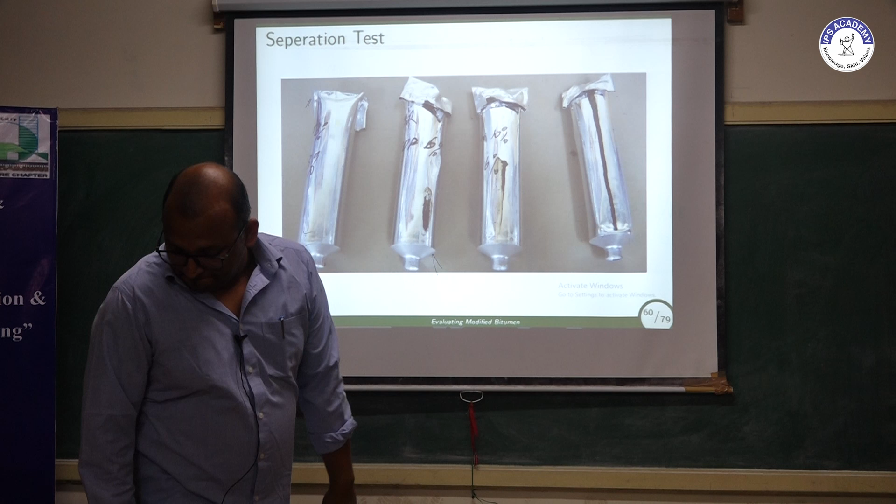The next test on neat binder, which we do for polymer modified binder or any modified binder, is elastic recovery, similar to your ductility test. Here we take a briquette, which is different. We stretch the binder to 15 centimeters of distance, and then we cut it. If there is elastic property, it will try to regain its shape. We check what percentage of shape is regained, and that is known as the elastic recovery.

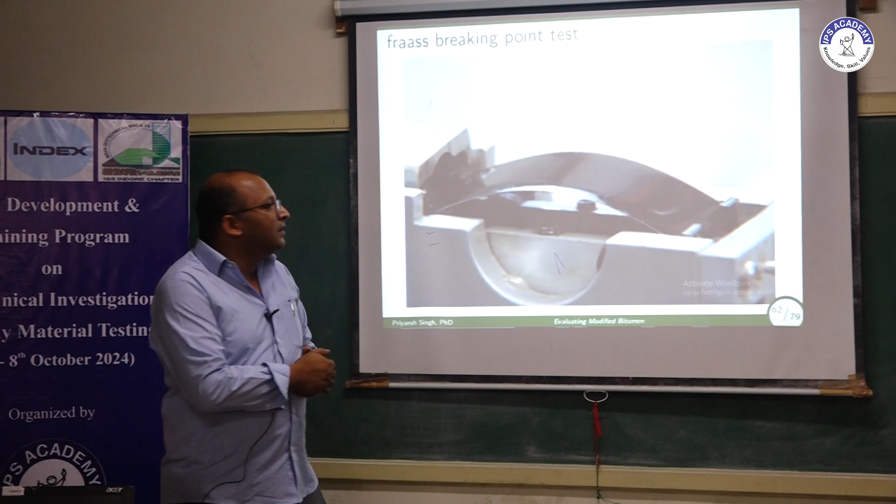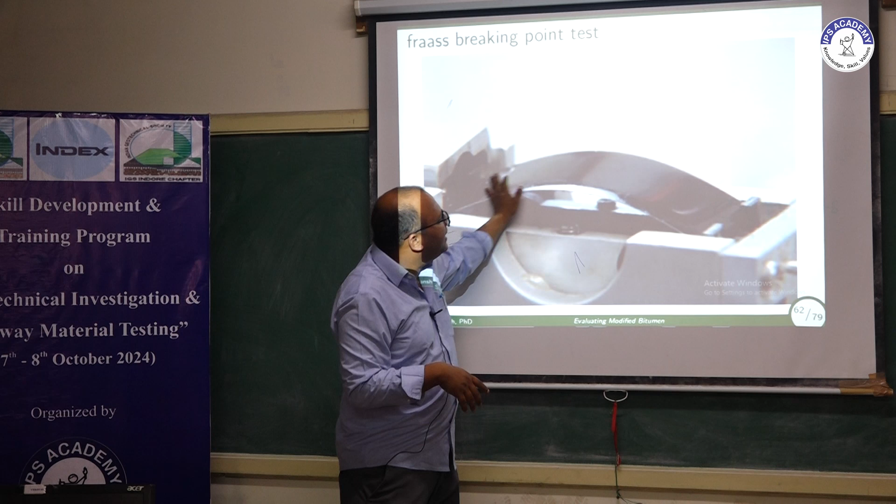The next test at 0 degrees Celsius. We now have more sophisticated tests to characterize binder at 0 degrees, but we won't discuss those. This Fraass breaking point test characterizes binder at low temperature. There is a small film coated with your binder, and then you decrease the temperature, maybe to 0 or below. After every 2 or 3 degree decrease, you press the sheet so it bends. Whenever the binder attains a certain brittleness, due to bending it will crack. The point at which the binder cracks is taken as the Fraass breaking point.

Then on short term aged sample, what short term aging is we have already discussed. The test we do is G star by sine delta, and for the short term aged sample, the value of G star by sine delta should exceed 2.2 kPa.

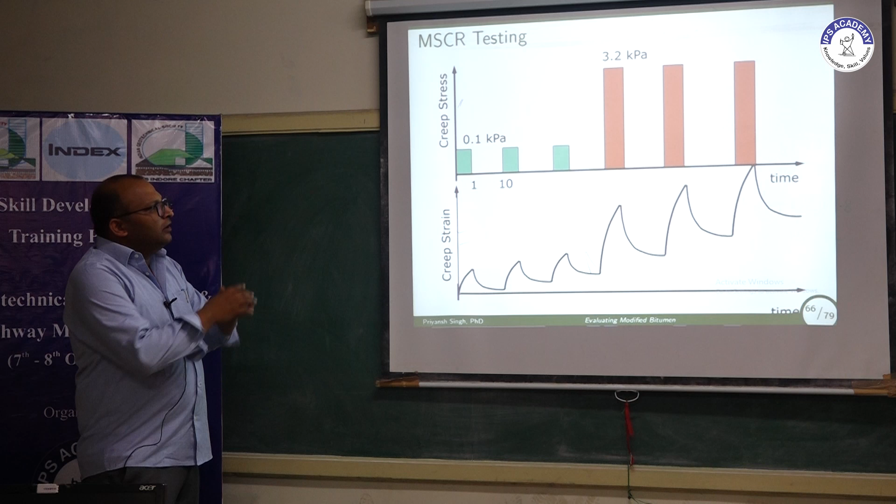All the tests we have done so far have not characterized the viscoelastic nature correctly. In order to address this, a new test is introduced, known as MSCR, or multiple stress creep recovery test. This is similar to your triaxial test.

Here we load the binder for 1 second, then give 9 seconds of resting time. Again we load, give 9 seconds of resting time, for 10 cycles, and then we increase the load to 3.2 and repeat for another 10 cycles.

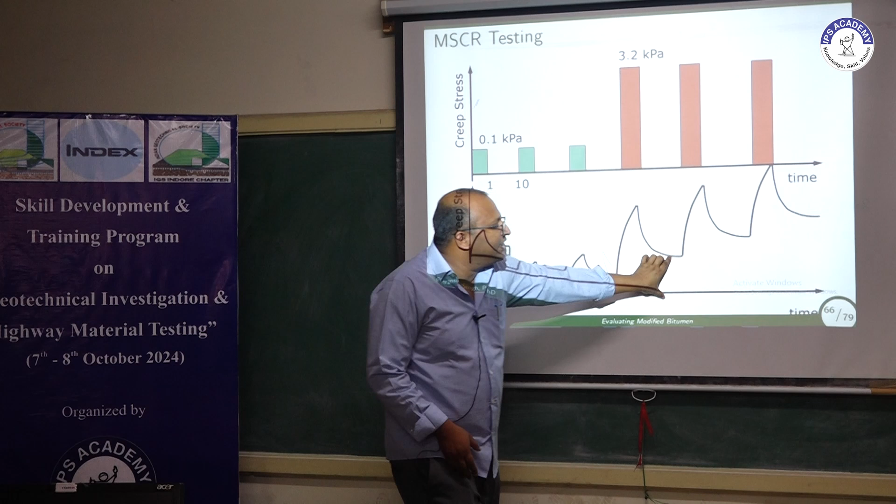Now if it were an elastic material, how should the graph look? If I load it, the curve would immediately come down. So whatever the stress curve is, the strain curve would be similar. But this is not an elastic material. So whenever you apply load, the strain develops with time, and when you remove the load, the strain recovers partially but not fully, since this is not elastic. So at the end of each cycle, there is some accumulated strain, and that keeps adding up as you increase the number of cycles.

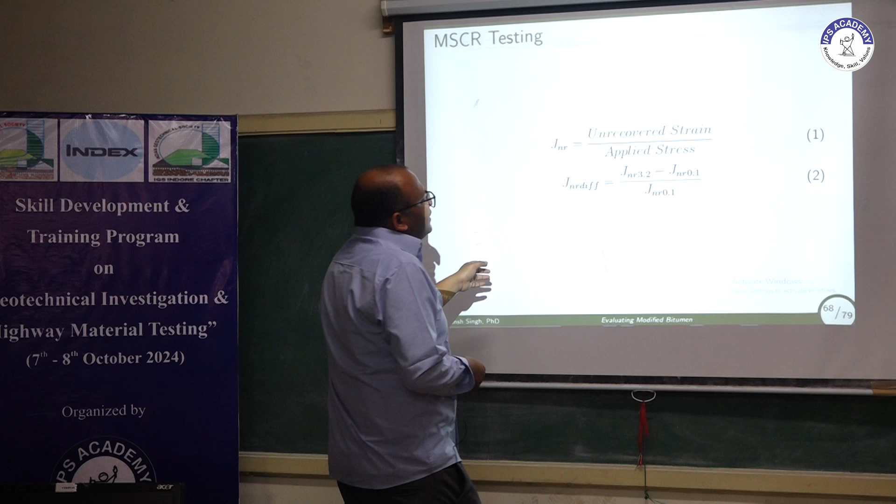Based on this, you can define certain terms. Whatever is recovered, you call recovered strain, and whatever is not recovered, you call unrecovered strain. Based on this, we define an index called JNR, which is a function of unrecovered strain upon the applied stress, and the difference between the two loadings applied—since you can calculate JNR when you apply 0.1 kPa of load, and JNR when you apply 3.2 kPa of load. The difference of these two is called JNR difference.

Then on the long-term aged sample, we test for G star sine delta, and for G star sine delta on the PAV binder, the value must be less than 5000 kPa.

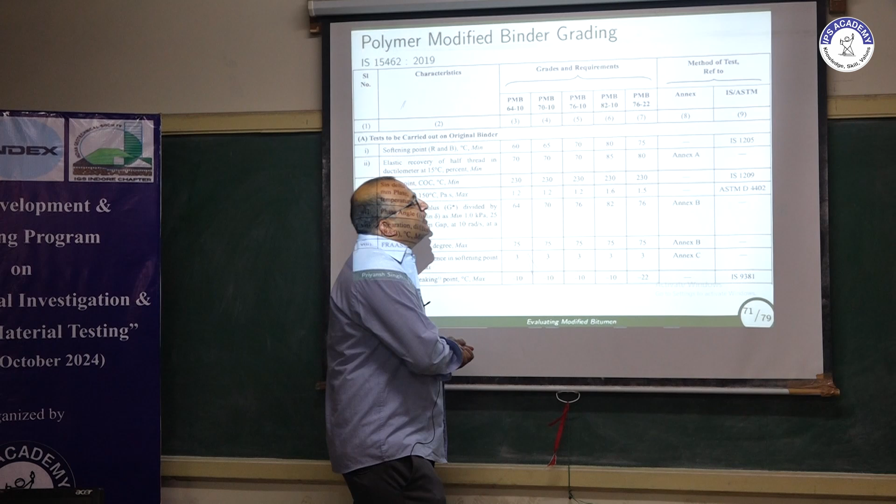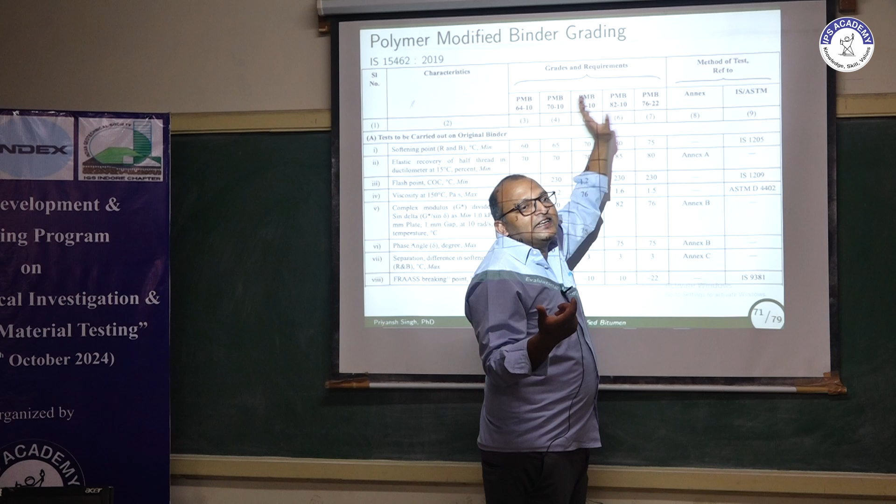Based on all these tests, this is the specification table of polymer modified binder. Based on Indian standard, we currently have 5 polymer modified binders: PMB 64-10, PMB 70-10, PMB 7610, PMB 8210, and PMB 7622. What does this mean? PMB 64-10 means this binder can be used where the maximum pavement temperature is less than 64 and minimum temperature is higher than -10. Similarly, PMB 8210 means maximum temperature should be less than 82, and this is the pavement temperature I am talking about, not the air temperature, with minimum temperature higher than -10, and you need to satisfy all the properties discussed in previous slides.

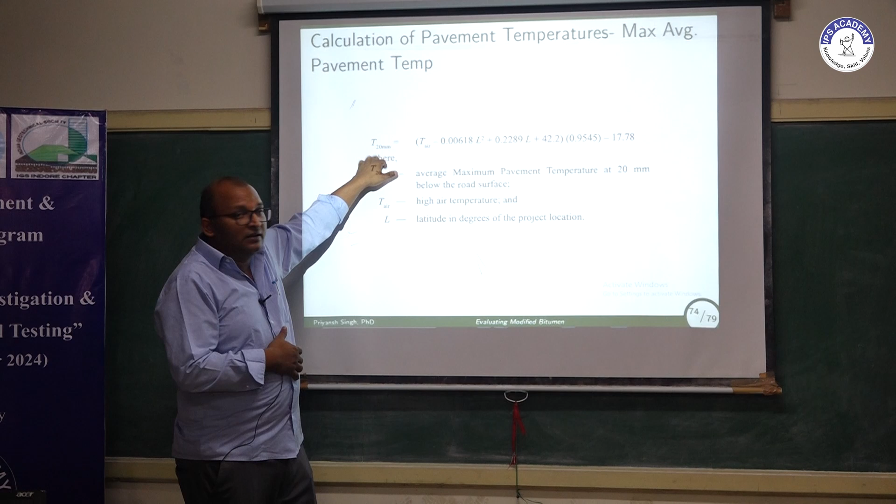Now, how do you determine the pavement temperature, since you cannot directly measure it? For this, an empirical equation is suggested by the IS code, based on the air temperature and latitude of the region. If you have the air temperature and latitude, you can estimate the temperature at 20 mm depth of the pavement. That will be the input for your grading. Based on all this information, we have these 5 grades of binder which you have already seen.

Now the question is, we have signified the temperature, but is signifying temperature enough to cater to the need of traffic, to cater the need of load or loading on the road? No. Even if temperature is low but your load is very high, then pavement demands a higher grade of binder.

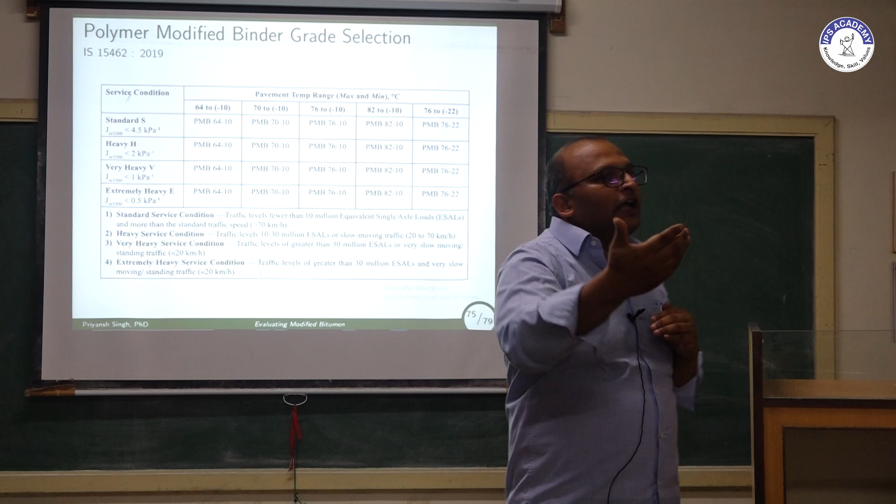So in order to do that, there is a concept of grade bumping. Let's suppose I have a region where I have temperature in the range of 64 and -10, but I have a very heavy or heavy condition of traffic. So instead of selecting this grade of binder based on temperature, because my traffic is heavy, I will just go one grade up. This is called grade bumping.

If traffic is very high, I will again increase one grade up. So even if temperature scenarios are lower but traffic is high, then the grade bumping needs to be exercised.

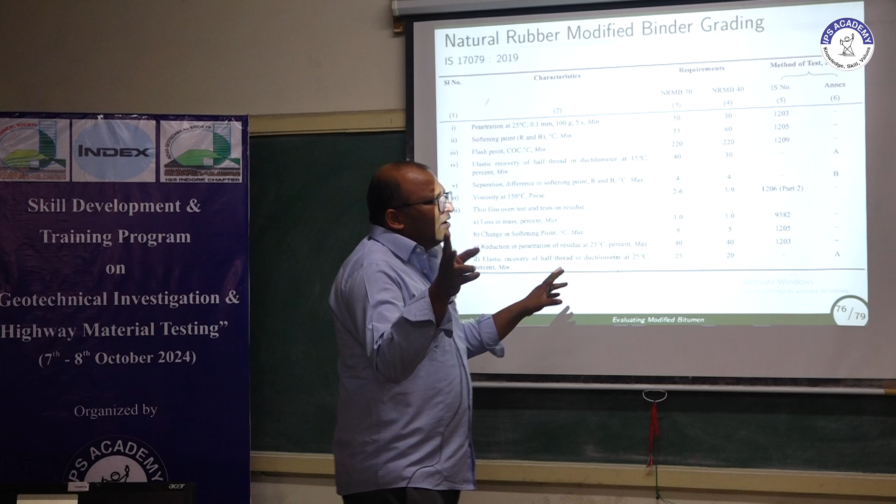Similarly, we have natural rubber modified binder gradation, I will not go into it, they are similar. Now we have only two types of natural rubber modified binders, NRMB 70 and NRMB 40. But all those testings are not defined here for the CRMB binder because the grain size of the crumb rubber modified binders is bigger compared to the polymer modified binder. Normally when we do DSR testing, the air gap between two plates is 1mm or 2mm maximum, but the grain size is sometimes bigger than 1mm. So the testing is kind of doubtful in the case of CRMB binder.

So again, people are working to modify this grade, and there is a group of people along with the Central Road Research Institute and IIT Delhi. They are currently pursuing a project to make a full-fledged Superpave grading system, including both CRMB and polymer modified binder. I am also a part of that, and I will also perform some testing.

Okay, so that is from my side. Hope it has given you something you didn't know.

Okay, thank you. Thank you, sir. It was a wonderful and thoughtful session.